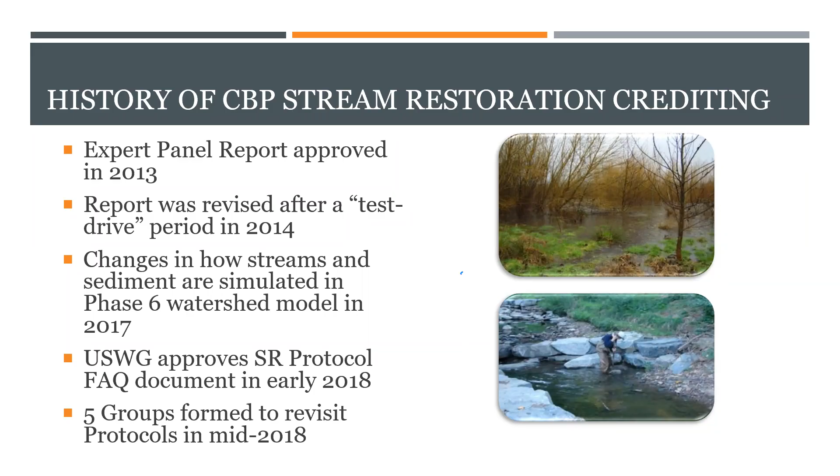So in mid-2018, we formed 5 different groups consisting of about 75 different experts to revisit different elements of the protocols. I've already said the word protocols probably 15 times. So just to make sure we're all on the same page, these were the original 4 from the 2014 report. They reflect the different pollutant removal mechanisms for stream restoration: prevented sediment, in-stream denitrification, floodplain reconnection, and then dry channel RSCs were pulled out a little bit separately. They were credited as a retrofit practice, but still considered one of the protocols since they're often lumped with stream restoration techniques.

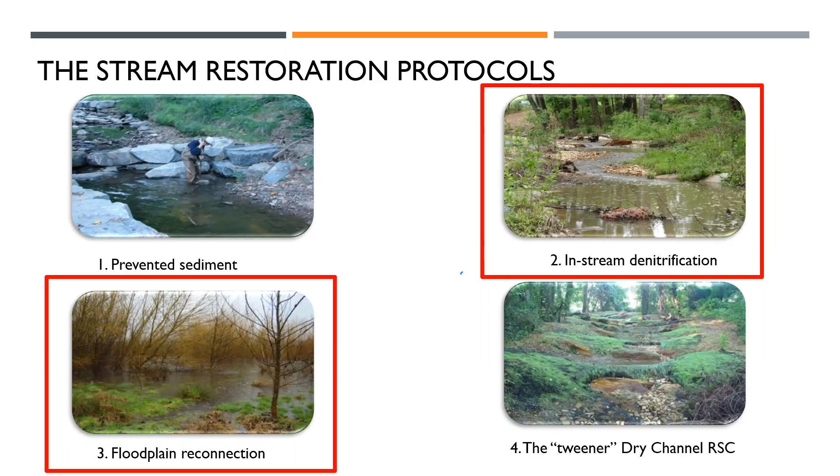As part of this revisitation, one of the other groups did add a 5th protocol for prevented sediment, for outfall and gully stabilization practices. It basically is an alternative for protocol 1 if you're working in a really vertically incised system. But we have other webcasts and resources on that.

So this is the group that we are going to be talking about today. It was referred to as group 4 in our list of different groups and different protocol numbers. So I'll try to not get you all mixed up with all the different numbering systems we use to keep track of everybody. But we had a really great team of experts involved in this effort from the private sector, academia, nonprofits, and local governments, all engaged in revisiting and revising the protocols.

There were a couple of guiding principles that were used throughout this process. Part of it, as I mentioned, because there was a revisitation of the Bay Program's modeling tools, they wanted to make sure that all the tweaks were consistent with that tool and compatible with the model. That's just a necessary evil of working within the Bay Program TMDL framework. It's always one of the principles that we have to follow.

The other set of principles were related to making sure that the new guidance was consistent with the original recommendations, but able to reflect the latest science and experience. Over the last 5 years, there have been hundreds of miles of stream restoration projects implemented since those first protocols were released in 2014. And there have been a lot of lessons learned that we wanted to make sure were reflected in these new protocols and guidance while staying true to their original intent.

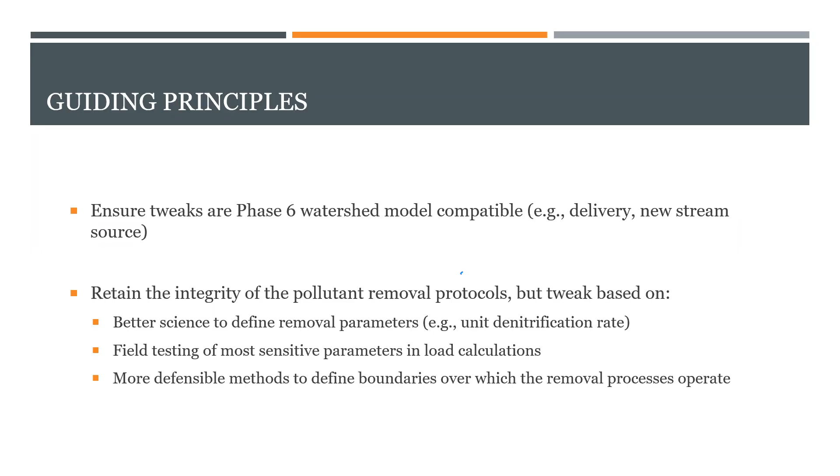All right, so the first thing that I want to get into is this focus on the different design approaches that are used for floodplain reconnection. So again, we're focusing on projects that are primarily designed for protocols 2 and 3. However, of course, a lot of these projects are kind of ticking all of the boxes, including protocol 1.

While the protocols are generally agnostic, they did not want to really throw any shade on any particular design approaches. The experts felt that it was really important to add some clarity as to sort of the common principles, the terminology, as well as adding some figures and things like that to make sure that folks were on the same page when you're talking about legacy sediment removal or regenerative stormwater conveyance systems or stream conveyance systems.

They focused on sort of two different approaches, the first of which is floodplain restoration using legacy sediment removal. Basically, this is the idea where you're removing legacy sediments from the floodplain in order to reduce bank heights, expand hyporheic exchange. Your goal really primarily is to reconnect the floodplain with the coarse gravel hyporheic aquifer that underlies the floodplain. There are a couple of key terminologies that are involved here.

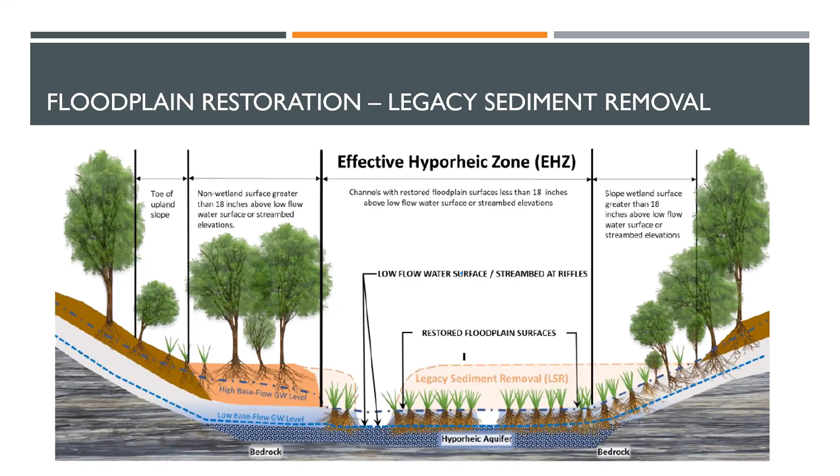Those principles are similar for the other primary technique, which is floodplain restoration involving raising the stream bed. This approach essentially accomplishes a lot of the same goals. The objectives are the same in a lot of ways, but you're raising the surface water level, generally either by filling the incised channel with native materials in order to elevate that invert and get the water out onto the floodplain more often, or you're installing riffle grade control structures or beaver dam analogs or something like that in order to slow down the flow velocity and promote more floodplain access during storm events.

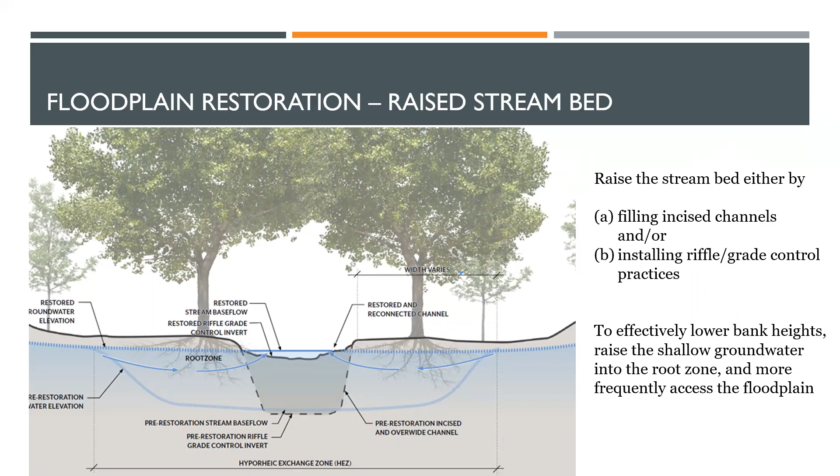So again, the goals are to lower those bank heights, get more connection between shallow groundwater and surface water in the floodplain, and get more interaction with that root zone. In both cases, you have some sort of overall qualifying criteria. Basically, the group recommended that in order to be eligible for pollutant removal credit under the Chesapeake Bay TMDL, you have to, first of all, meet the qualifying conditions that were originally outlined by the expert panel in 2014. They felt that those conditions still held up well and should remain in place.

They added a couple that applied regardless of the design approach. Basically, mostly common sense things, but things that they wanted to make sure were codified in these recommendations. And that was making sure that the project meets the applicable floodplain management requirements for the stream corridor, making sure that you're not putting structures and other infrastructure at risk due to the increased access of the surface water to the floodplain. Also making sure that the duration of ponding in the floodplain is consistent with the restoration goals.

There are certainly values to micropools for amphibian habitat and things like that, and those are called out. But they wanted to make sure that we were avoiding the circumstance of creating a wet pond in the floodplain where you have this long-term inundation of large volumes of water in the floodplain that could potentially do damage to riparian vegetation communities and things like that. And sort of along those lines, just demonstrating consideration to potential unintended consequences.

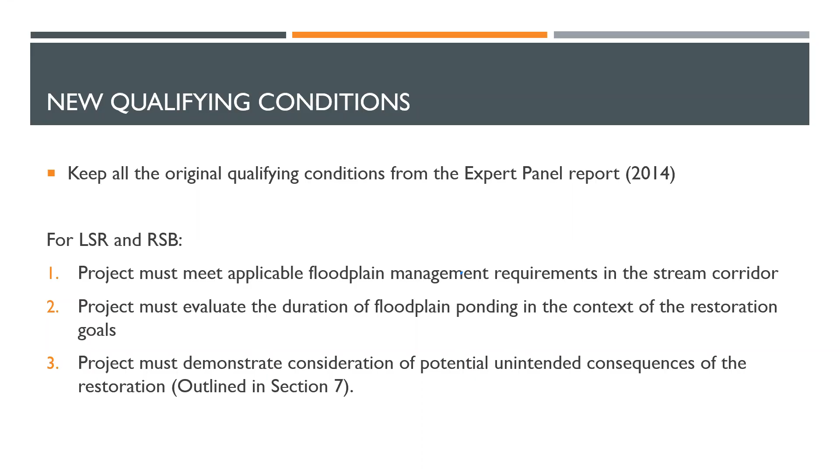All right, so now kind of getting the initial stuff out of the way as far as the design approaches and the qualifying criteria, I'm going to go ahead and dive into the recommendations for each of the protocols. This is what the general sort of simplified calculation looks like now for protocol 2.

So in order to get the load reduction for Protocol 2, which is just a nitrogen credit, you have to define what the group called the EHZ, or the effective hyporheic zone. Then you multiply that area by your denitrification rate and then adjust it by some site-specific factors to account for conditions that promote those denitrification conditions.

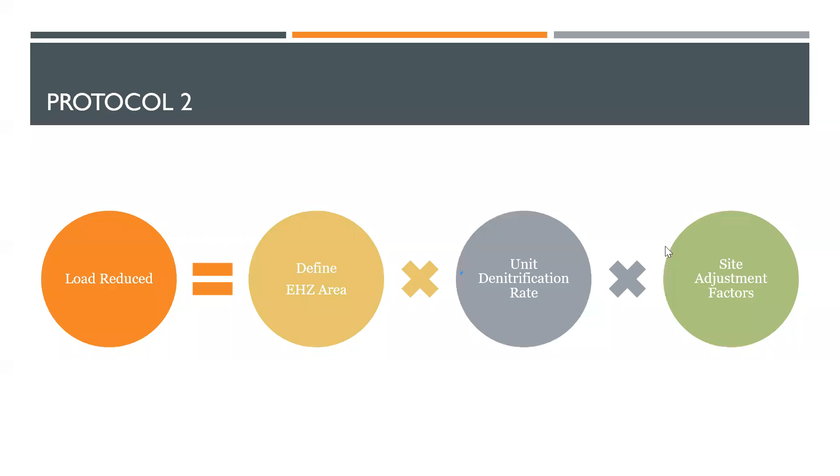So this is a change from the way that the original expert panel had defined Protocol 2. There were not those site-specific adjustment factors. And then we're going to talk again about this hyporheic zone. So the original expert panel had, you might remember, the hyporheic box. It was a three-dimensional construct that extended 5 feet below the invert of the stream channel and then 5 feet on either side of the banks, at least as a default.

The panel sort of clarified that you should be doing some level of testing to confirm that there wasn't a constraining layer that maybe cut off your box at only 2 feet of depth or something like that, like a bedrock layer or something. But based on experience, a lot of times that was not being conducted in the field. It was also a challenge in terms of the use of defaults for things like bulk density measurements in that hyporheic box that were part of the equation as well. A lot of times folks were relying on defaults for those numbers.

So anyways, the experts felt that it made a lot more sense, and based on the available literature for denitrification as well, to shift the units to this areal-based approach. So replacing the hyporheic box with this area called the effective hyporheic zone that essentially extends across the floodplain, most likely further laterally than maybe the original box concept did, but only to areas where the floodplain surface is 18 inches or less above the low flow groundwater elevation. The reason for that being the interactivity of the floodplain root zone that creates a really important carbon source in the floodplain that promotes denitrification.

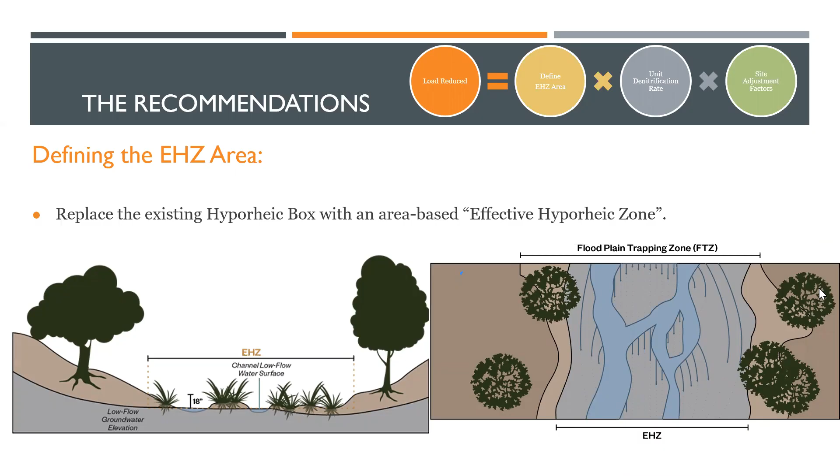The next update goes to that unit denitrification rate. So part of this was necessitated by the change to an area-based rate. So the original denitrification rate was based on that volume measurement. It was a pounds per ton measurement. So now the group went back and they did a really comprehensive literature review to make sure that the new rate reflected the latest literature on denitrification.

And so what they ended up deciding on after they did a really deep dive into it was to take the difference in the median nitrate uptake rates between restored and unrestored streams based on a study done by Newcomer Johnson et al. in 2016. And then they adjusted that by about 30% to show how much of that uptake was from denitrification. And so that was based on a study by Mulholland et al.

And so they really felt that after the review of the literature, this worked in a couple of ways. It was an area-based rate. It focused on denitrification, and it was reflective of restoration sites all across the watershed, quite a number of restoration projects, whereas the original denitrification rate was largely based on a handful of measurements in Baltimore County, Maryland. So this really expands the scientific basis behind these rates.

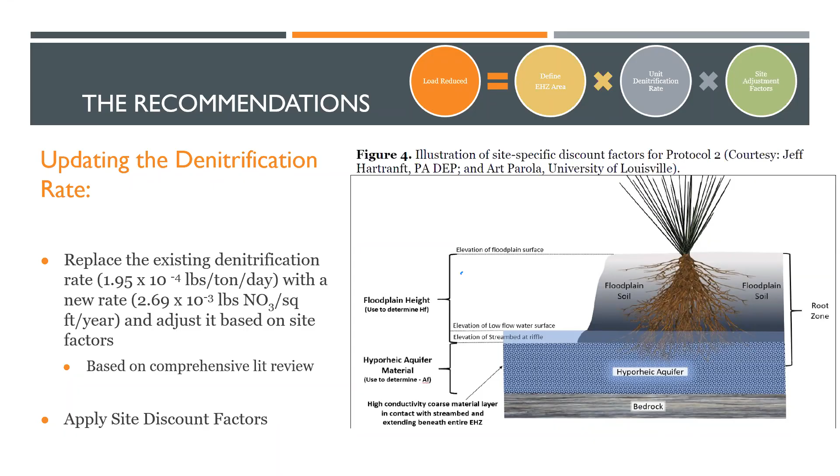The other thing that they really wanted to do was then apply these site-specific discount factors to that rate, which sort of represented what they felt was sort of best case conditions. So they came up with this adjustment equation that was developed largely by Art Parola from the University of Louisville, who was a member of this expert group, in consultation with the other experts on the group, where basically you take this base rate and then you multiply it by these 3 different adjustment factors. So you have your base flow reduction factor, your floodplain height factor, and an aquifer conductivity factor. Each of these takes into consideration different elements that would affect the denitrification rate.

So with aquifer conductivity, for instance, you're looking at coarser grain materials that allow more water to interact between the surface and the floodplain. So the more water that is moving through that root zone, the more opportunity that there is for denitrification to occur, as opposed to being sort of restricted with those finer grain materials, clays and things like that, that might prevent water movement through that floodplain hyporheic zone. The floodplain height factor accounts for sort of sustained saturation in that zone, providing ample opportunity for that denitrification to occur, and sort of the same with the base flow reduction factors.

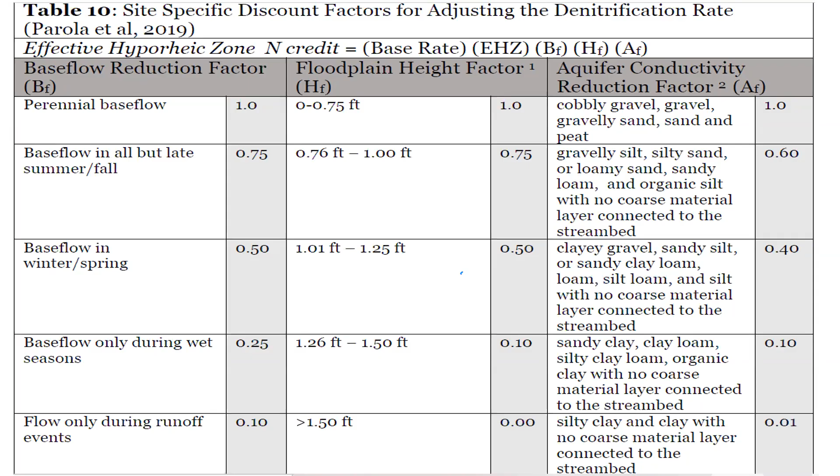If you're getting base flow in that hyporheic zone throughout the year, you are increasing the opportunity for that denitrification. So that's how these factors were derived.

A couple of other notes on changes for Protocol 2. They also decided to eliminate the bank height ratio requirement. Most of these floodplain restoration approaches are low bank projects. Sort of the whole purpose of their design is to increase interaction between the surface water and the floodplain, and so they felt that it was a bit of a redundant requirement.

They also wanted to emphasize that in this case, as well as any of the BMP protocols for that matter, the final reductions should reflect the difference between pre and post restoration conditions. Especially with these floodplain restoration techniques, it's important to have an understanding of where there is already some level of hyporheic exchange happening in a site prior to restoration.

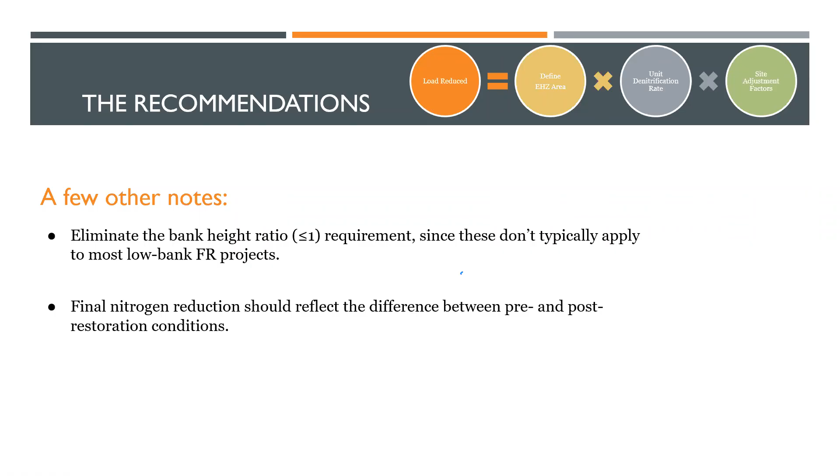In most cases, these sites that are being chosen for restoration are, of course, the most degraded. They're heavily incised. There probably is not a lot of connection. So this might be sort of moot, but you still have to go through the process of investigating and demonstrating that this is an improvement over existing conditions, and only taking the pollutant removal credit for that improvement.

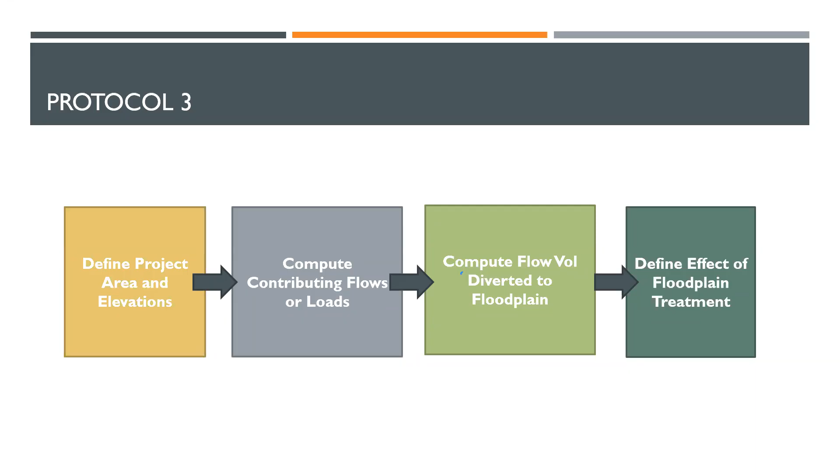This is, again, consistent with the original recommendations from the expert panel. So the big change here was in how that flow diversion component of the equation is done. Originally, the expert panel used what we were calling an upstream approach, which used basically rainfall runoff models to figure out how much of the annual stream flow was being diverted into the floodplain.

The concern from the experts and the practitioners is that a lot of times those rainfall runoff models are not capturing some of the flow that's generated from smaller storm events. And in some of these really low bank projects, there is a lot of water getting out on the floodplains that was not being captured using those approaches. So the decision from the experts was to replace that upstream approach with a downstream method, which uses scaled representative USGS gauge stations in order to calculate overbank flow.

So essentially you look at this USGS stream flow data from watersheds with very similar characteristics and use that to figure out how much of your annual flow is falling in this treatment area, which is above what can be contained by the channel, and below this 1 foot depth that is a default cutoff, where if the flow is over a foot, it may be bypassing floodplain treatment.

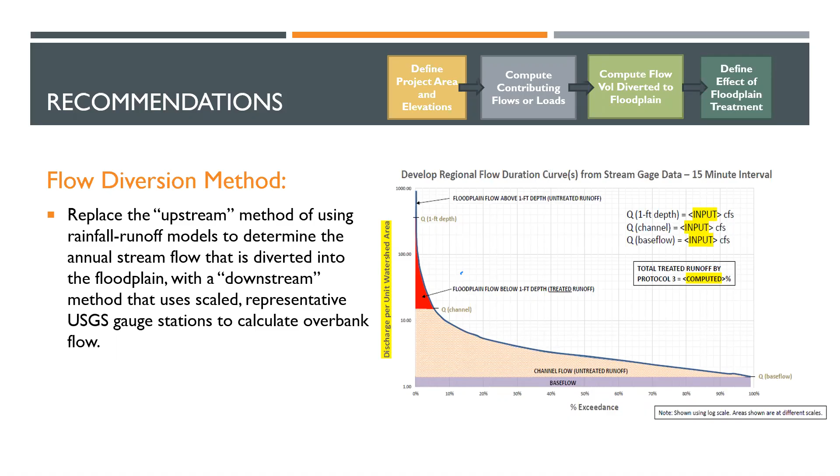The other big change with Protocol 3 was an update to the floodplain treatment efficiencies. So the original expert panel relied on wetland pollutant removal rates from an older wetland expert panel report from, I believe it was 2006 or 2007. Since then, the Bay Program's wetland work group convened and completed 2 expert panels on non-tidal wetland efficiencies. And so their comprehensive literature review involved hundreds of studies, including floodplain wetlands.

And so these experts chose to, again, remain consistent with the concepts of the original panel and just essentially updated these efficiencies with these new rates based on this more recent literature review. There are different types of wetland BMPs that were created by that expert panel. And so basically the guidance is that when selecting the rate that is most appropriate for your Protocol 3 project, you choose the one that reflects the predominant wetland type at the site. The definitions are all in the report, so I would encourage you to take a look at that to figure out what is appropriate.

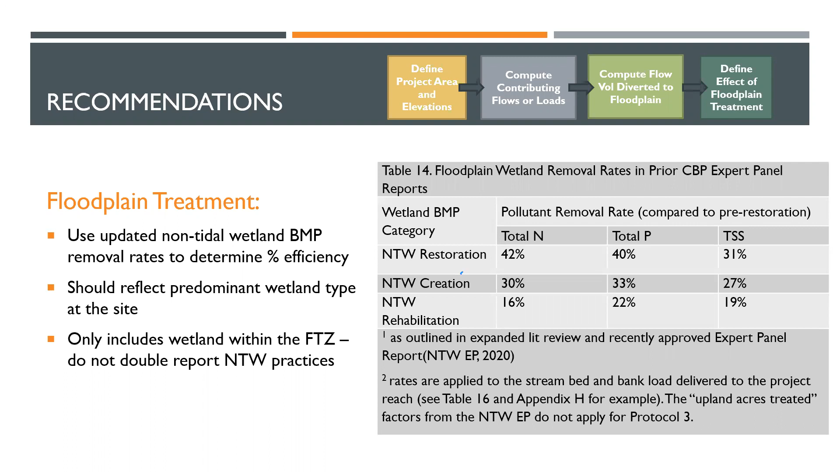And then finally, I'm not going to go into all the details here. I think we are going to be working with the CAST team at the Bay Program to do a webinar sometime later this spring, a little bit more specific to how to do this in CAST. But you also have to figure out how much loading you have that's reaching your restoration site, because you have to have a number that you're applying that efficiency to, right? You need to know how many pounds of nitrogen, phosphorus, and sediment you're reducing by 42%, for instance.

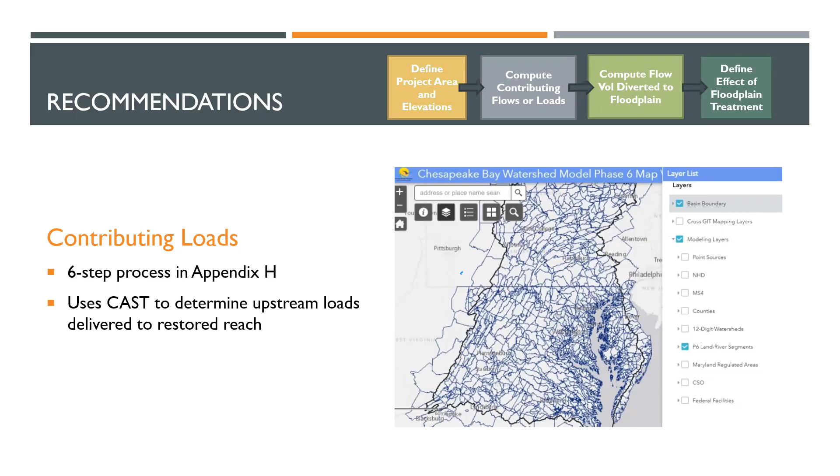And so there is a process outlined in an appendix that goes step by step with screenshots and visuals for how you use CAST to get that delivered load. CAST will give you what that upstream load is that's being delivered to your project reach. So you can put in your location and a few other details there, and it will spit out a spreadsheet for you that tells you the pounds of nitrogen, phosphorus, and sediment that are being delivered to your site for restoration.

All right, and just to wrap this part up, there are a couple of other recommendations around Protocol 3. There is no longer an upstream watershed to floodplain surface area ratio reduction. It's a bit in the weeds, but for those of you who do the protocols, it was just another thing that you had to keep in mind. That is no longer part of the recommendations.

Again, the note that these should reflect the difference between pre and post restoration conditions is particularly important when you're thinking about the wetland conditions on the site, when you're choosing your efficiency. So if there were existing wetlands, that's going to affect what your overall load reductions are. Similarly, presumably even in some incised streams, there's some amount of flow that is getting out onto the floodplains during larger storm events. So that needs to be accounted for as well.

I mentioned the 1 foot cap on floodplain flow. There are circumstances where that can be relaxed. There is some data that was provided to the group on sort of lower flow conditions, allowing more of those particulates to be settled out into the floodplain.

The exception to that is that Maryland has asked for sort of a special exception. This is documented in, I forget the appendix number, but it's the last appendix in the report. They are reserving the right to kind of make some adjustments to that. They didn't feel comfortable with relaxing the 1 foot cap at this time and are planning to do some of their own investigation on that. So if you're in Maryland, just keep that in mind.

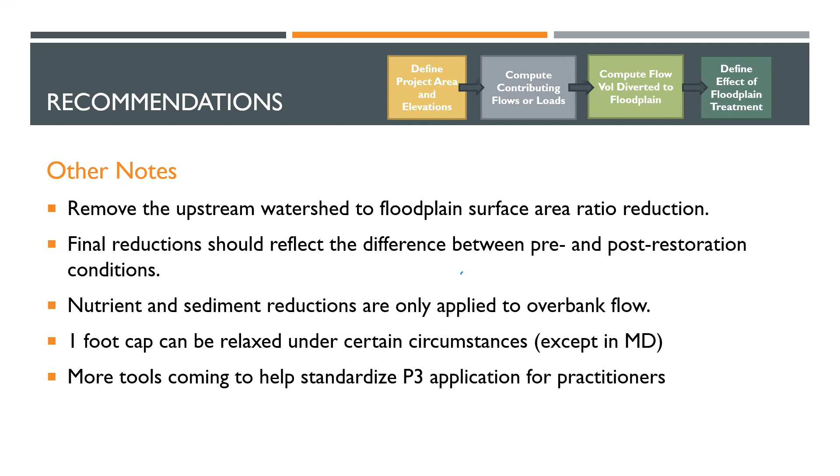And then I also mentioned we're working on some more tools for standardizing that Protocol 3 application. So as we get that information and as those are developed, we will continue to let you know. All right, before I dive into the environmental considerations, I'll take a quick pause and see if there are questions from folks on the protocols.

One of the questions for Protocol 2, if the stream channel bottom is more than 18 inches vertically from the floodplain, can you still claim Protocol 2 credit for the areas within the channel? Yes, I think you could. There is some ambiguity there because the idea is really to promote exchange with the floodplain. I think you probably could. It would be a pretty limited amount of credit, assuming that the width of your channel is not particularly wide. So is the juice worth the squeeze?

But I would assume that there is going to be some degree of exchange between your surface water and your higher groundwater beneath the channel. And that is consistent with the original expert panel recommendations and the hyporheic box concept. So yes, you can claim that area as part of Protocol 2.

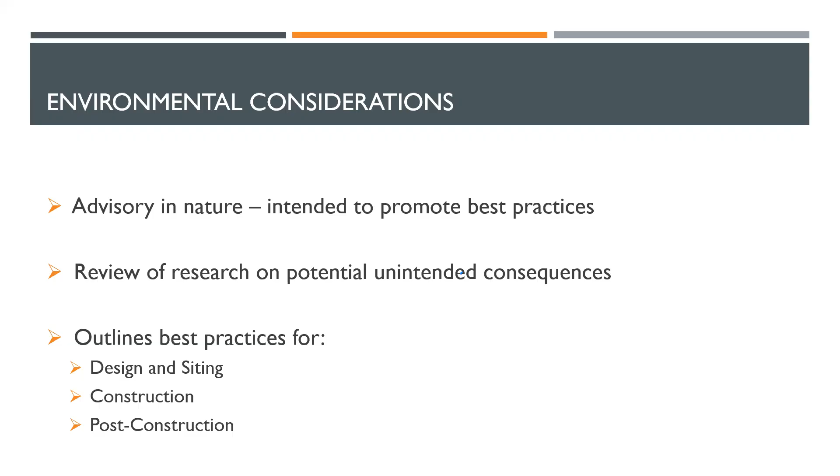So I'll warn you that this is going to be sort of the driest section of the presentation, in the sense that it is mostly bulleted lists here that I'm going to present on some of those best practices with fewer graphics and photos, but bear with me because I do think it is important to talk about, because we do have literature available, albeit somewhat limited, but there's also quite a bit of just anecdotal experience from the completion

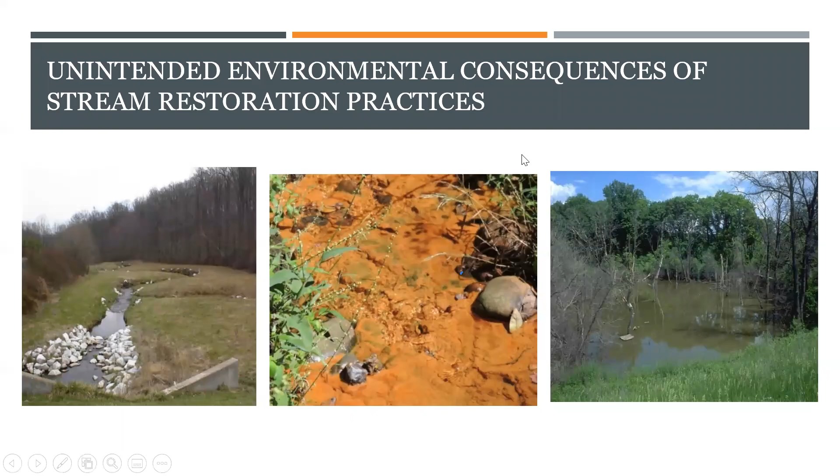of projects over the last several years, where stream restorations can result in things like loss of tree canopy or riparian forest communities, iron flocculation, extended ponding within the floodplain that can cause impacts on riparian vegetation communities, failures from projects due to extreme storm events and things like that always have the potential to result in damages to downstream infrastructure or floodplains as well. So these are all things that need to be taken into consideration during all phases of the project.

That said, all of the impacts are related to a lot of factors that can vary across sites and across projects. So a lot of times these unintended consequences are the result of things like inadequate project assessment. It can be site-specific factors, regarding existing soil conditions, different grade controls that are in place, extreme flow and storm events, as we see higher and higher intensity events with climate change, that is increasingly an issue if projects are undersized or use an inappropriate reference condition for design.

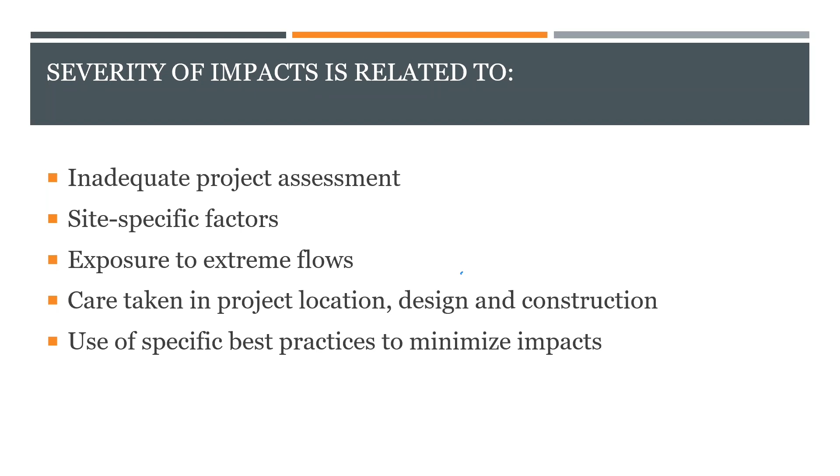So, care needs to be taken when selecting the project location, design, construction techniques, as well as other alternatives to stream restoration to try to minimize these impacts. A couple of notes that the group wanted to make sure were mentioned is that a lot of these impacts need to be considered in relation to the unrestored condition. It, again, seems sort of obvious, but a lot of these systems are heavily degraded.

And so that has to be part of the consideration as well, as does sort of other interventions that could be done in the upland areas, either before or in combination with stream restoration, to make sure that the impairments that are affecting those stream corridors are being addressed, to make sure that they're more successful in the long run.

There's also sort of a lack of data or information with these longer term longitudinal studies of stream restoration. Some of the ones that we have, for instance, at the Big Spring Run site in Lancaster, Pennsylvania, have indicated that in some cases the adverse impacts might be short term, although they are common, but there is an adjustment period after which there might be some recovery over several years as the construction impacts fade, as riparian plant communities reestablish, and things like that.

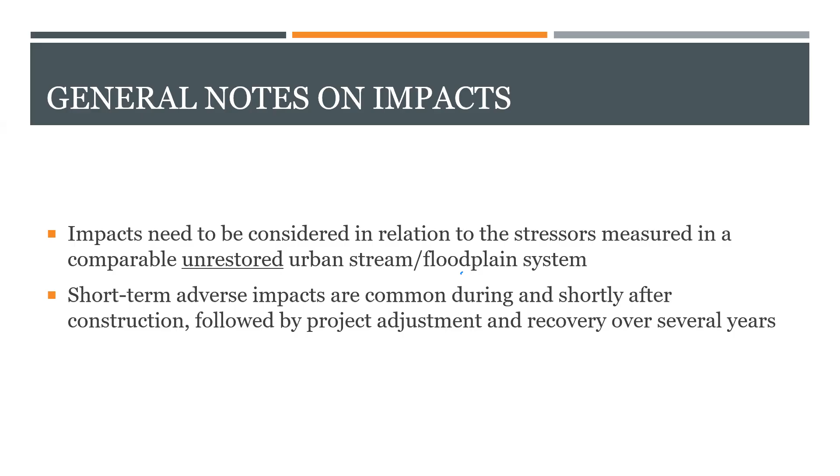And so one of the recommendations is really just an increased need for research at these cross-disciplinary long-term studies that can take a look at these different factors, how they might change over time, so that we can start to chip away and get a really firm grasp as to what the best practices are for avoiding them, and making sure that we're really doing the best that we can to improve the functions and ultimately the ecological conditions in these systems.

So I mentioned upland alternatives to stream restoration. It comes up a lot. It is in the qualifying criteria actually for the BMP, so it's more than sort of just a best practice, but just to make sure that these projects are part of a comprehensive watershed-based approach to restoration. A lot of times that means looking at what options you have in the upland, especially in highly urbanized areas where these really flashy systems or high flow events are going to always create a problem in these stream systems.

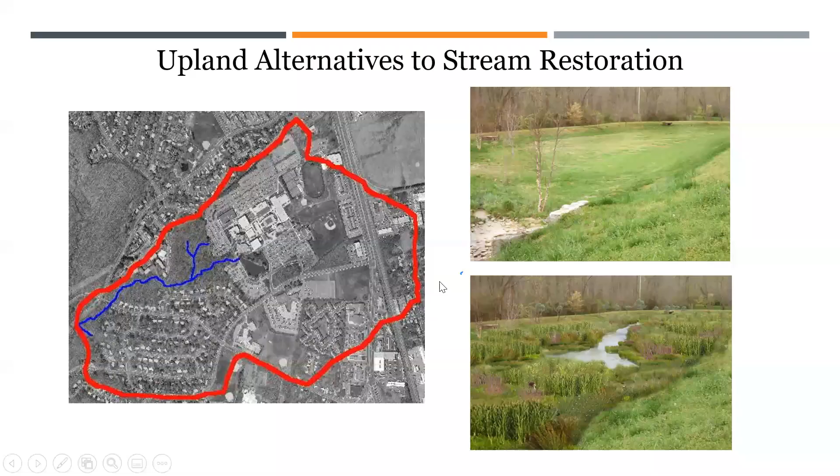It's going to impact what your restoration objectives and goals are, but also should be part of the consideration. Are there opportunities to implement retrofits in combination with these projects? We have some good examples, including past Bubba's winners, where this has been done with quite a bit of success. It's not a silver bullet, but it is something to always make sure you're keeping in mind, that just a single stream restoration is not going to be as sustainable if it is not considered as part of a comprehensive restoration strategy.

In terms of project assessment and design, this is sort of getting into the specific best practices that the group recommended. So I mentioned evaluating other options, identifying impairments, also conducting habitat function assessments prior to design, making sure that you're identifying where you already have quality stream and wetland resources present, so that you can preserve what you can, or at least make sure that you are doing the best you can to improve upon the existing conditions, even if your objectives call for a shift in what that habitat community might look like. Make sure that those are fully considered in the design site selection phase.

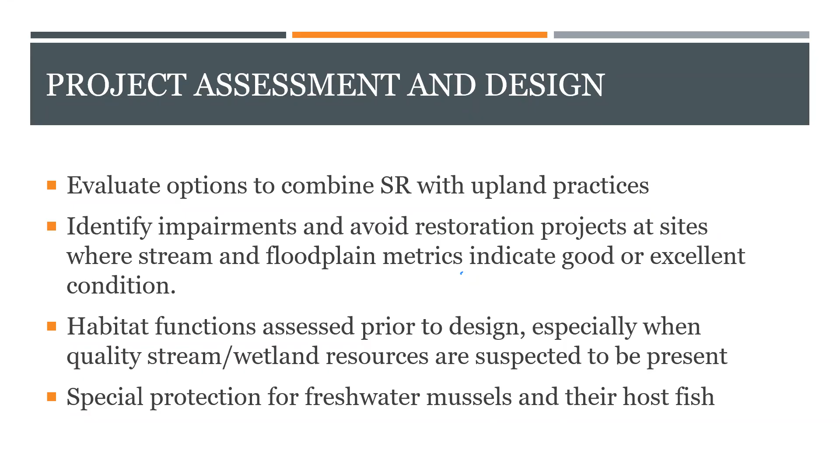There was also an emphasis through collaboration with some other partners and other work groups and goal teams that focus on fisheries systems, on thinking about protections for things like freshwater mussels, their host fish and their habitat needs. Along those lines, for projects that involve in-stream structures, it's very important to consider aquatic life passage issues, especially in more vertical systems, where check dams and things like that can potentially obstruct passage. So making sure that those are considered. I mentioned it in the qualifying conditions, but these stagnant pools within the stream channels, as well as on the floodplain, need to be considered.

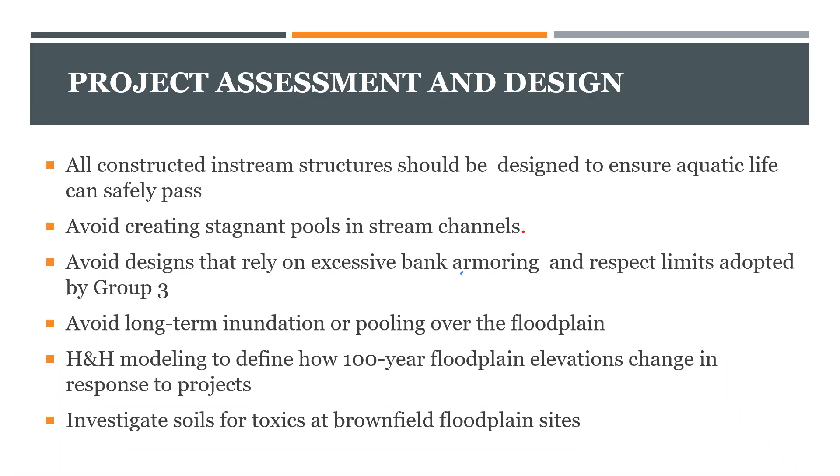If you have not watched our webcast on Protocol 1 for prevented sediment, or read the report on the new recommendations for Protocol 1, I recommend that you do that. That talks a lot about the issue of excessive bank armoring, using softer approaches to reduce bank erosion in these systems, while also maintaining or enhancing habitat value. And then the others are sort of self-explanatory, making sure you're avoiding significant expansion of the floodplain, or at least documenting and defining what that is going to be, to make sure that you're working with the appropriate authorities within your state or community, to make sure you're covering all your bases there.

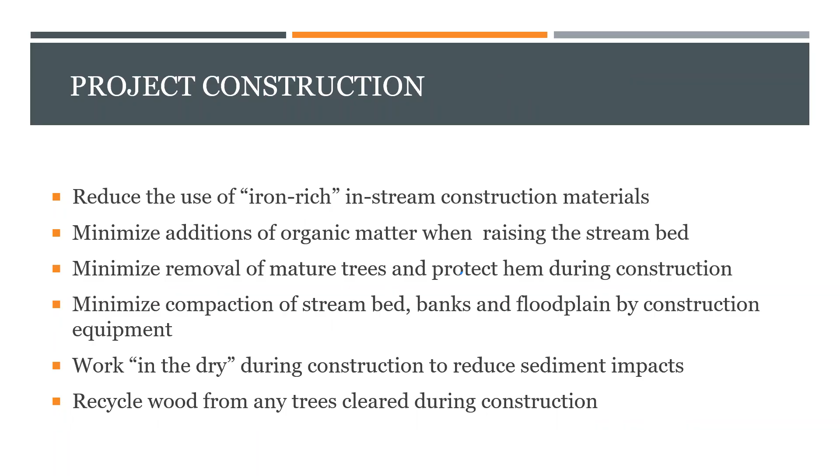During the construction phase, there has been some evidence that iron-rich in-stream construction materials can leach, causing flocculation over time. So that's something to be aware of. There are some new resources and research in that area that were addressed and laid out by the panel. Similarly, with the addition of organic matter in the stream bed, that can sometimes cause leaching concerns as well. At the same time, protecting mature trees that are existing in the floodplain to the extent possible is considered a best practice, minimizing compaction, working in the dry, but also recycling any trees that do have to be removed within the site is also recommended.

And then in the post-construction, a plug for another of the 4 reports. I think I've mentioned them all now at this point. The first group looked at verification for stream restoration practices. So some simple visual indicators that you can use to determine if the project is still meeting the pollutant removal functions that it was designed for. So you can do that by just sort of doing a stream walk, flagging some of those indicators, and then if warranted, going back and doing a deeper investigation into the cause. We call them forensic BMP investigations to figure out what you can do to address those issues.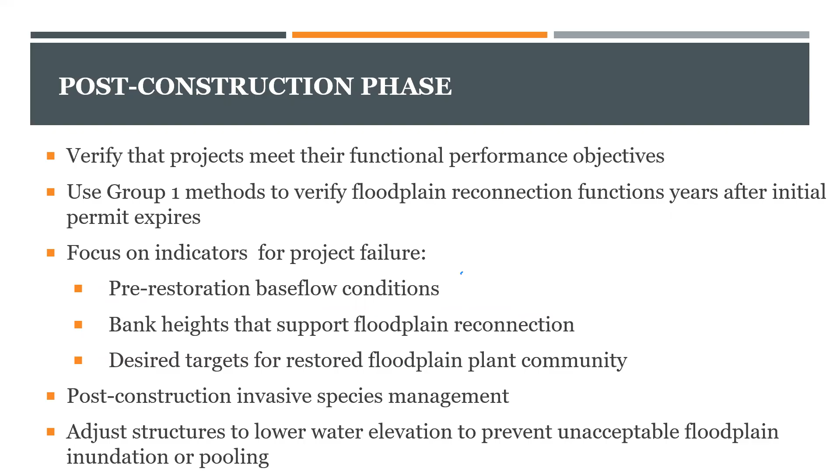We also recommend making sure that you're focusing on things like bank heights and desired floodplain plant community targets, as those are really essential for the definitions of both Protocol 2 and Protocol 3, as well as the removal efficiencies associated with them. Part of that, of course, is also invasive species management, and making sure that there isn't accidental dewatering of the stream system, or potential obstructions that might cause pooling or inundation at inopportune times or in inopportune places. So that sort of wraps up that section as well.